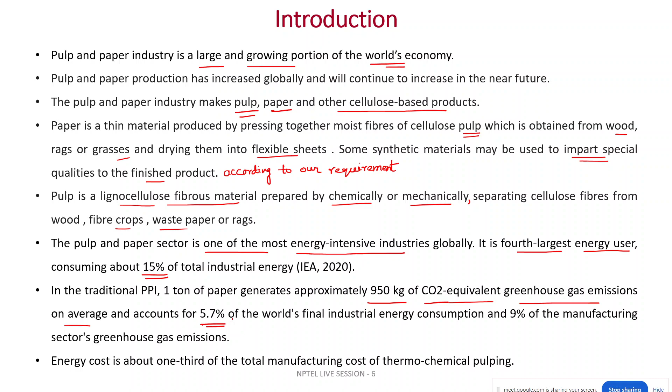This PPI, pulp and paper industry, is also a source of pollution. There will be various kinds of pollution. One is air pollution, because there is a lot of CO2 emission. There will be water pollution as well, because in the chemical pulping process we generally use a lot of chemicals. Also in the bleaching of the pulps, different chemicals are used. So these are the sources of environmental pollution.

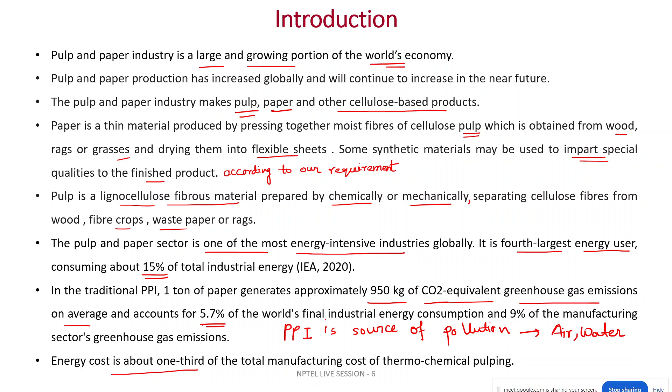Energy cost is about 1/3 of the total manufacturing cost. So you can see how much cost we are involving for energy consumption. It's around 1/3 of the total manufacturing cost of thermochemical pulping. Thermochemical pulping is a type of pulping we will discuss.

Next is pulp mills. They separate the fibers of wood, or from other materials such as rags, waste paper or recycled paper, straws, in order to create pulp. Pulp is the digested form of that wood, digested in the presence of some cooking liquor. So we will discuss what cooking liquor is and how the operation is performed in a digester, under high pressure and some temperature; obviously that pressure and temperature are optimized parameters.

Paper mills primarily are engaged in manufacturing paper from the wood pulp and the fiber pulps also, and they may also manufacture from the converted paper products. Now this wood is composed of cellulose, lignin, hemicellulose and some extractives. There might be fats, resins, pectins, and this can be extracted at the end.

The fiber from nearly any plant or tree can be used for paper making. However, the main concern is the strength and the quality of the fiber, and other factors can complicate the pulping process. That depends on the kind of trees you are using, softwood or hardwood. So depending on that, the strength and quality of the fiber will be different.

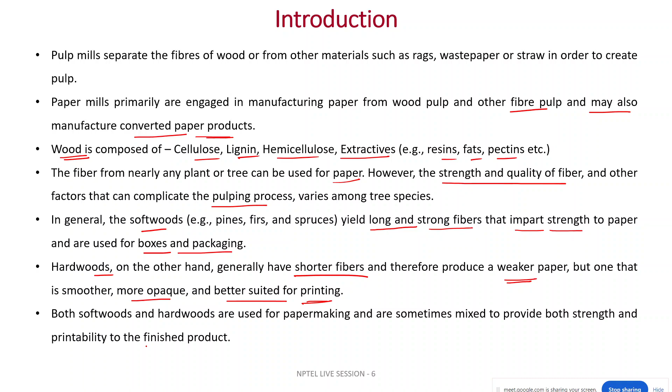Now we see the process outline for paper making, the overall process that we are going to discuss in the next few slides. First section is raw material preparation. So what is the raw material here? Different kinds of woods, rags, grasses, like that. Those are debarked, cleaned, washed, and chopped into a reduced size. Obviously, water is being used, so there will be production of wastewater.

Now the chopped, reduced size raw material will be sent into the next unit, that is the pulping section. In the pulping section, there will be mechanical and chemical separation of the wood fibers from the other impurities. So there we will be using a lot of chemicals and also a lot of water. Now the mixture of dissolved wood fibers in water will be sent for the pulp washing and bleaching section. That would remove the residual lignin. Also there is use of water and wastewater will be collected at the end.

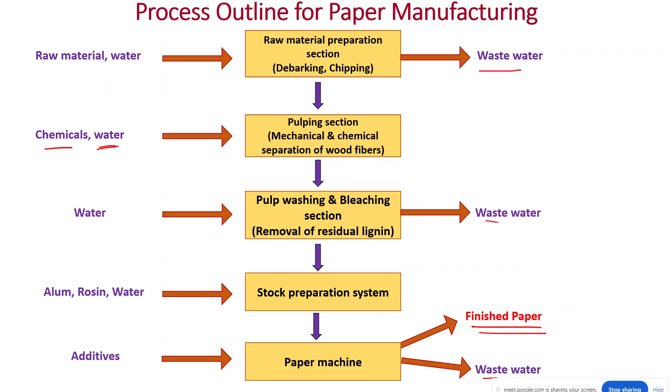Now we will discuss briefly the raw materials we specifically use for paper making. There are two types of raw materials for paper making, namely wood and non-wood portions. Wood may be eucalyptus; non-wood, banana leaves, bamboo leaves, meaning the stem kind of thing. Of these, the pulp and paper industry uses wood as a raw material. Each type of wood produces different types of pulp. That's why, depending on the finished product, we need to carefully choose what kind of wood we are using for the process.

You see from this variation, in the hardwood, the cellulose, hemicellulose and lignin are different from the softwood. Hardwood has cellulose of 45%, whereas softwood has 42%. Hemicellulose: hardwood 30%, softwood 28%. Lignin: hardwood 20%, softwood 27%. Extractives: hardwood has 5%, softwood has 3%.

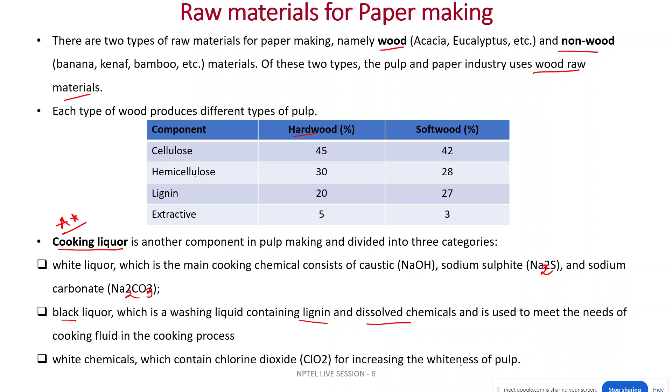And white chemicals contain the bleaching agent chlorine dioxide for increasing the whiteness of the pulp. That is at the end.

So pulping process: wood is the raw material and it is mostly composed of cellulosic fibers. Cellulosic fibers give the tensile strength. Tensile strength means that you are holding these two and there will be tensile strength created in this direction. And along with cellulosic fiber, the lignin matrix will be there. It provides the compressive strength this way. Tensile strength in this way and compressive strength is this way. The force is acting.

Cellulose is a linear poly-beta glucose and pure cellulose is white in color. Cellulose is the fiber of primary interest in paper making. It comprises about 50% of the wood if we are considering oven dry weight. So 50% of the wood is cellulose and that is of the primary interest for paper making.

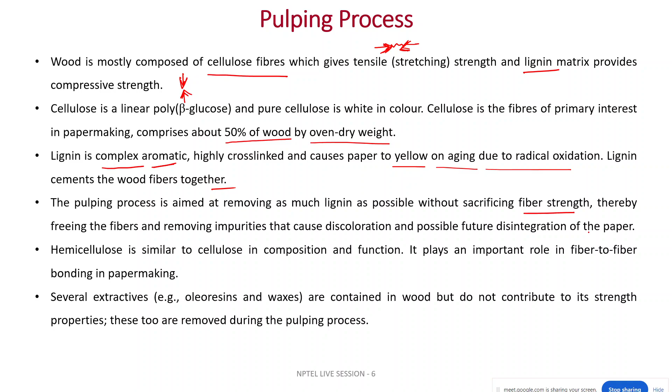Now, the pulping process mainly aims to remove as much as possible of the lignin content without sacrificing the fiber strength, thereby freeing the fibers and removing the impurities that cause the discoloration and possible future disintegration of the paper. We need to remove those impurities, and the main target is to remove the lignin content.

Now, hemicellulose is also a component of the wood, since we already discussed cellulose and lignin. Hemicellulose is similar to cellulose in composition as well as function. It plays an important role in fiber bonding in paper making. Several extractives, waxes, oleoresins are contained in wood but they do not contribute to its strength properties. So these can be considered impurities and should be removed by the pulping process.

I hope it is clear that pulp is nothing but the digested form of the wood. In wood there is cellulose, hemicellulose, lignin. Cellulose and hemicellulose are desired content. Lignin is not a desired content. Lignin should be dissolved in the cooking liquor and taken out. And that pulp is further processed through bleaching and other activities.

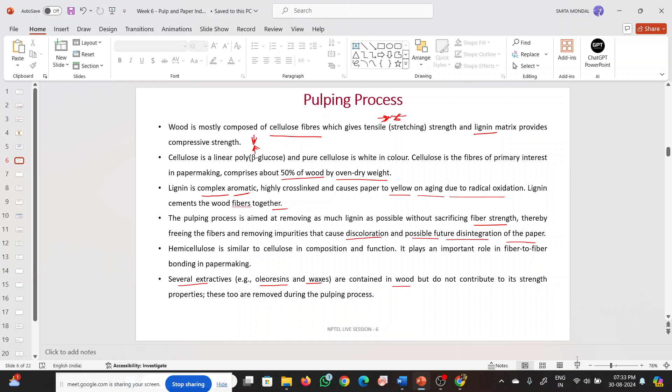Continuing to the pulping process, pulping can be of different types: mechanical pulping, chemical pulping, and chemi-mechanical pulping, which is a combination of the two processes. Mechanical pulping consists of grinding the raw material, more generally softwood, against an abrasive surface to defiber it, without any lignin dissolution. So without affecting the lignin, we are only trying to defiber the raw material.

Chemical pulping is mostly adopted industrially, that is the kraft pulping. Obviously, there are other chemical pulpings present. In this method, it separates the fiber from the raw material by making all of the non-cellulosic components soluble in a cooking liquor at a certain high pressure and temperature. This pulping gives better quality, but as I already mentioned, it creates a lot of pollution. Wastewater is created, and there will also be air pollution.

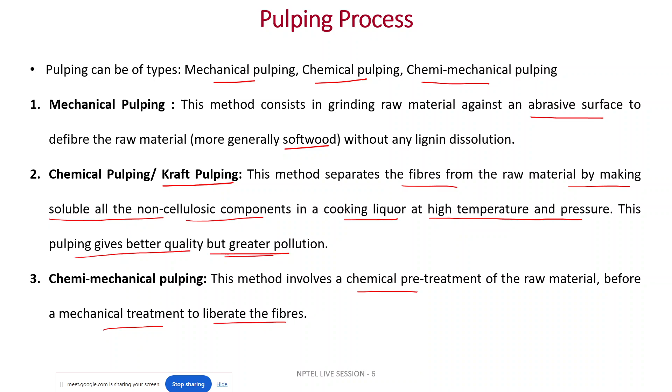Chemi-mechanical pulping involves a chemical pretreatment of the raw material, and then it is sent to mechanical treatment to liberate the fiber. So three methods of pulping are available, but mostly chemical pulping is adopted. You need to take care of certain important factors for pulp.

So the first factor is moisture content of the pulp. It is very important from the point of view of storage, transportation and handling. Also the dirt content of the pulp, particularly of recycled pulp, is important for its suitability to make fine paper.

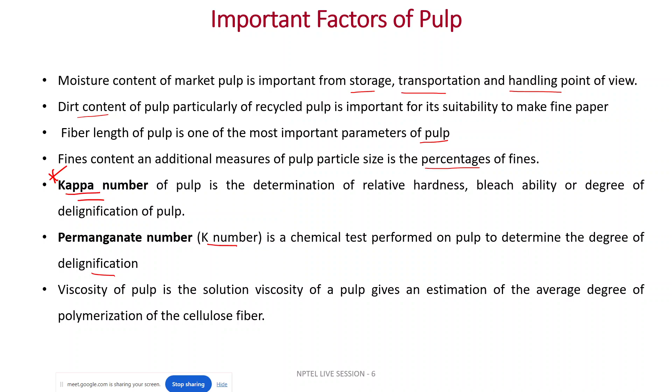So we already discussed the important parameter kappa number. The kappa number estimates the amount of chemicals required during the bleaching process of the pulp to obtain pulp with a degree of whiteness. Since the amount of bleach needed is related to the lignin content of the pulp, the kappa number can be used to monitor the effectiveness of the delignification or lignin extraction phase of the pulping process.

So the kappa number is nothing but monitoring of the delignification process. It is approximately proportional to how much residual lignin is present in the pulp. If more lignin is present, the kappa number will be higher, which denotes that the color of the pulp is very dark. The downstream processing will depend on that kappa number. If the kappa number is very high, the resulting pulp tends to be very dark, and vice versa. Kappa number can range from 1 to 100.

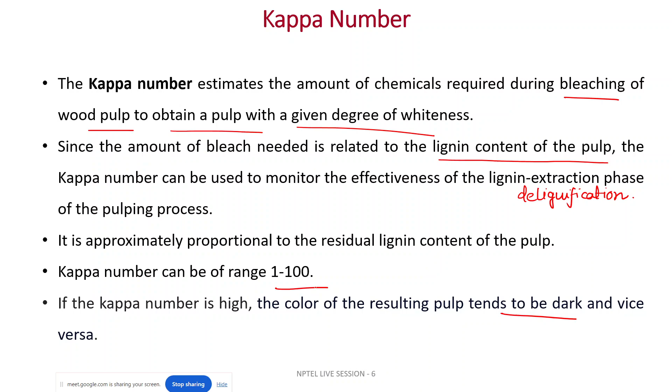So we already discussed very briefly three different kinds of pulp varieties, right? So the first one is mechanical pulp. One process is making stone ground wood pulp. In that, mechanical grinding of the wood into relatively short fibers is performed, used mainly in newsprint and wood containing papers such as lightweight coated and super calendered papers.

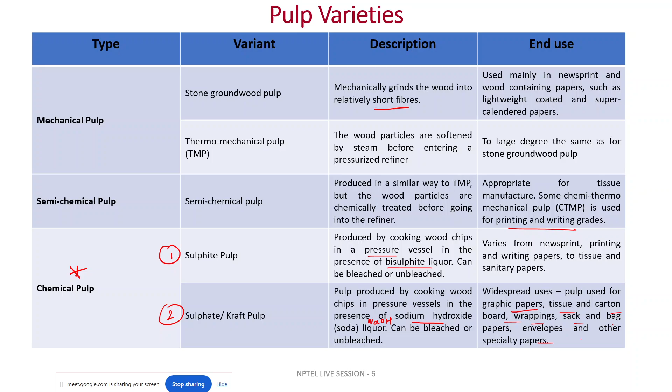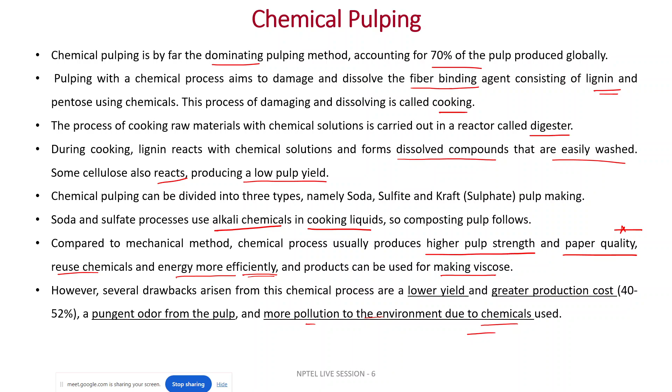The first process is the soda pulping process. In the soda pulping process, the cooking solution used is soda. Soda means sodium hydroxide, NaOH, is used. The soda solution's function in the process is hydrolyzing the lignin and the other fiber binding agents so that the fiber contained in the raw material will be released. The lignin content will react with the NaOH so that the lignin is released from this fiber.

Lacking cooking chemicals will result in a darker color of the pulp, and there will be difficulty in bleaching in the downstream process. However, excessive cooking chemicals can also reduce the yield through the degradation of cellulose fibers. You may think that with excessive chemicals there will be more yield of pulp. This is nothing like that.

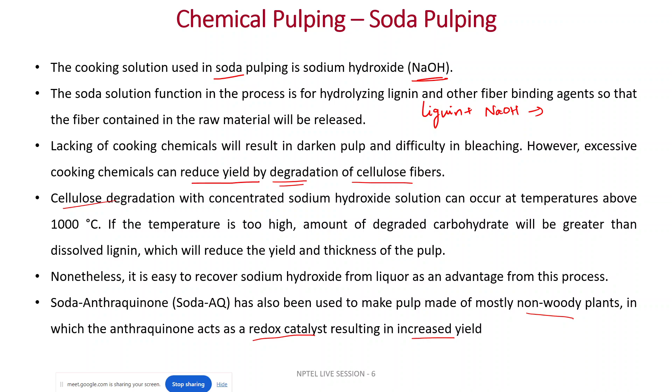Next process is sulfite pulping. The sulfite process produces wood pulp which is almost pure cellulosic fiber. We are using various salts of sulfurous acid, which are used to extract the lignin from the wood chips in a large pressure vessel, which is called a digester.

So, in the sulfite process, the salts used in the pulping process are either sulfites, SO3 2-, or bisulfites, HSO3-, depending on the pH. The counter ion may be sodium, calcium, potassium, magnesium, and ammonium. The lignin is converted into lignosulfonates, which are soluble and can be separated from cellulosic fibers.

Now, this sulfite process involves two types of reactions. First one is hydrolytic splitting of the cellulose, followed by reaction of the lignin with bisulfites.

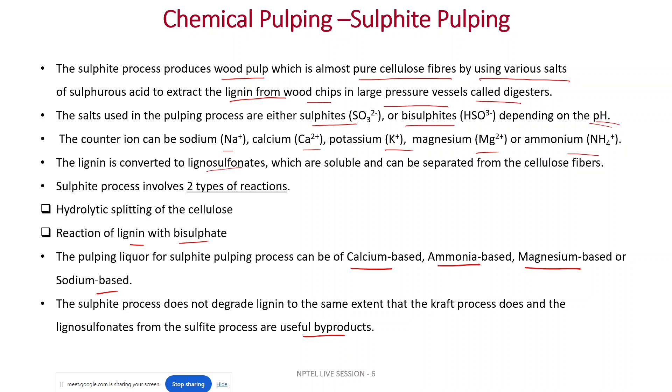So now we will be discussing the difference between the sulfate and sulfite pulping processes. There is a lot of difference; we will take them one by one. Let me write it as sulfate pulping, and here we will discuss sulfite pulping. Sulfate pulping is also known as the Kraft process, whereas sulfite pulping is also known as the magnefite or neutral sulfite process.

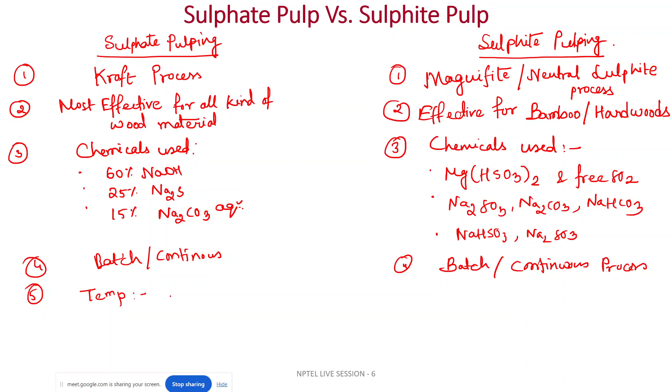Next, the sulfate pulping process is mostly done in continuous form, but overall we can say batch or continuous process can be followed in both cases. Next, the parameters. In sulfate pulping, temperature is maintained around 170 to 180 degrees Celsius, and very high pressure, 10 atmospheres. Whereas in the sulfite process, temperature is lower, 120 to 150 degrees Celsius, and pressure is lower, 4 to 6 atmospheres.

Next is the time for digestion: around 5 to 6 minutes, very fast. And for this one, the time of digestion is much longer, like 6 to 10 hours.

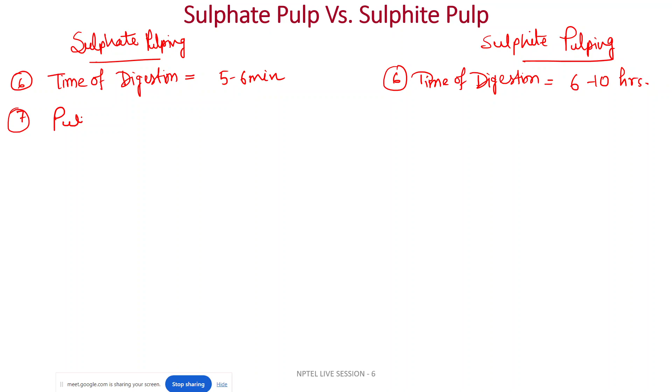The type of pulp produced, the pulp quality: sulfate gives brown color pulp. Chlorine dioxide is used for bleaching of the pulp, and the unbleached fibers are very strong.

Whereas in the sulfite process, the pulp is off-white, dull white in color, already white, and it is also easily bleachable. But here the fibers are weaker.

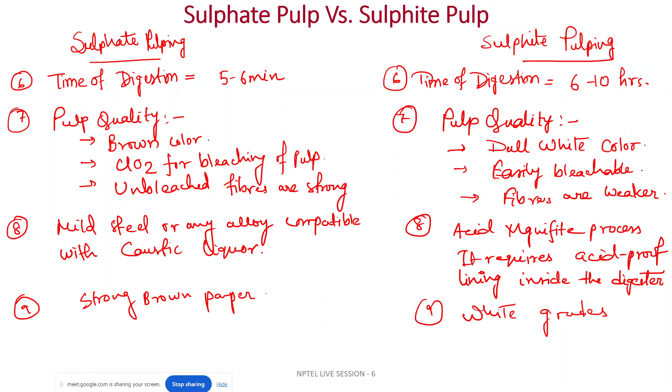Moving forward, we will now discuss the sulfate or Kraft process. The Kraft process dissolves and removes the lignin matrix from the cellulose fiber, just like other chemical processes. The active cooking chemical is white liquor, which consists of NaOH and sodium sulfide, Na2S. A highly alkaline chemical and wood mixture is cooked in a digester under high-pressure steam. The cooking liquor containing dissolved lignin and other extractives, collected from the bottom of the digester, is known as black liquor, and it is routed to a chemical recovery plant. Very important.

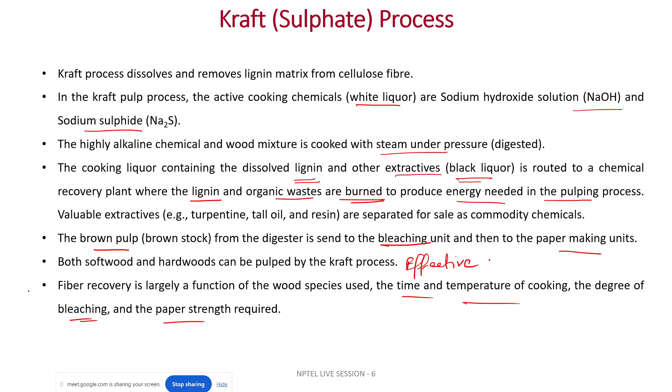There the lignin and organic waste are burnt in a smelting furnace to produce the energy needed in the pulping process, and the valuable extractives are separated for sale as commodity chemicals. Brown pulp from the digester is sent to the bleaching unit and then to the papermaking units. Both softwoods and hardwoods can be pulped by the Kraft process; it is very effective. Fiber recovery is largely a function of wood species, cooking time and temperature, degree of bleaching, and required paper strength. So I will discuss mostly the Kraft process chemical reactions involved.

So first is hydrolysis. Hydrolysis, see, in the Kraft process our main chemical is NaOH. So first is digestion, hydrolysis and solubilization of lignin.

So what happens? Suppose this is some kind of biopolymer, and you are using caustic soda, or NaOH. So you are giving some cellulosic OH content. Next, this biopolymer again reacts with OH. It gives a different product as ester. Some cellulosic ester is being formed. So the rates of these reactions are different. That's why you are getting different products.

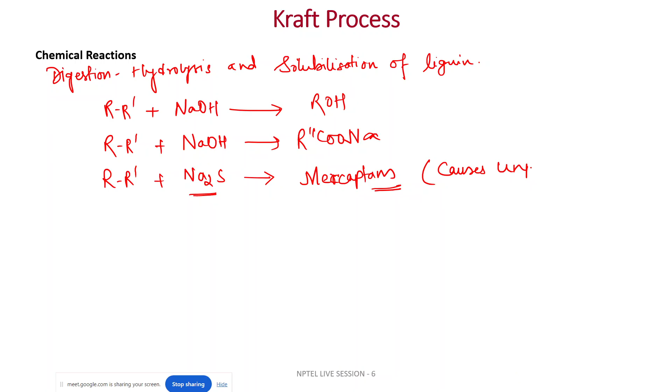These biopolymers react with Na2S. How this Na2S is coming, we will see in the next reactions. So they produce mercaptans, and this causes an unpleasant smell.

Now, in the flow sheet, you will see there is one section that is called the smelting furnace, smelting process, and another section that is the causticizing process. These two processes are very essential to supply the Na2S for digestion of the lignin. So what happens in the smelting process is that the lignin salt in the black liquor reacts with air, some preheated air you supply, and it will form Na2CO3.

Because this R contains carbon, hydrogen, oxygen. Okay, so this carbon will react with oxygen and it ultimately forms Na2CO3 and some CO2 gas. Now another, Na2SO4, also reacts with carbon and they form Na2S. So this Na2S is being used here.

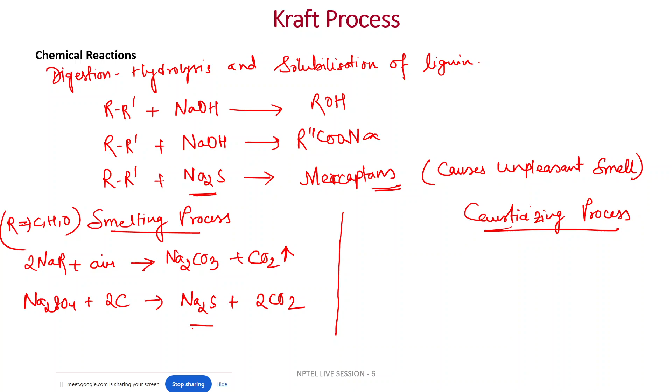Whereas in the causticizing process, this is further taken to the causticizing process. Na2CO3 reacts with Ca(OH)2 and it produces sodium hydroxide and CaCO3. This CaCO3 further reacts, it produces calcium oxide plus CO2. This CaO is hydrolyzed and it forms Ca(OH)2. So this Ca(OH)2 can again react with this. It again forms CaCO3, and these reactions are self-dependent, you can say.

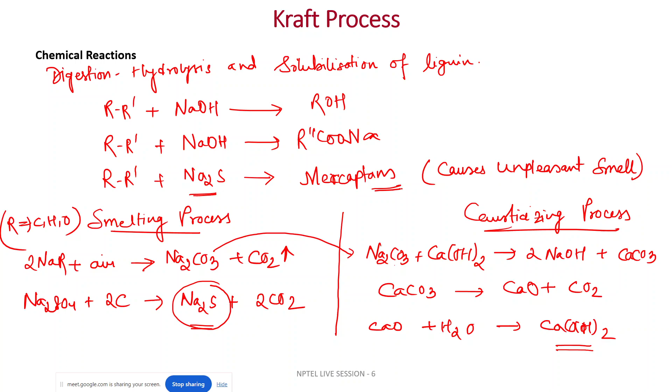So ultimately our main product is Na2S; we require to produce a sufficient quantity by this chemical recovery process so that it can be used in the digestion process. Okay, so yeah.

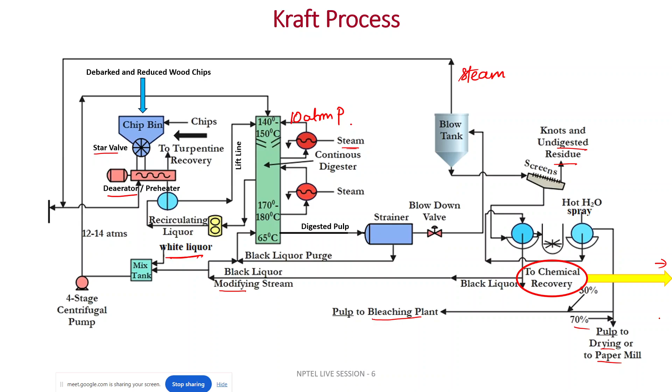And the pulp is being produced from the rotary filter. The solid content is sent to the bleaching plant, almost 30%, and 70% pulp is sent to the drying or paper mill. Now, we already see the 30% of produced pulp we sent for the bleaching.

So in bleaching, what happens? There will be a removal of the color residue, or the bleaching may be accomplished by use of some bleaching agent. There are various oxidizing agents we use. This agent must be cheap and have minimum degradation action on cellulose. It should not react that much. Traditionally, chlorine type oxidizing agents are used in stage-wise operation.

However, bleaching has been found to produce dioxin and other undesirable components in the bleach effluent. The use of chlorine as paper mill bleach has steadily decreased because of these undesirable components present in the effluent. To a substantial extent, chlorine is replaced by hydrogen peroxide.

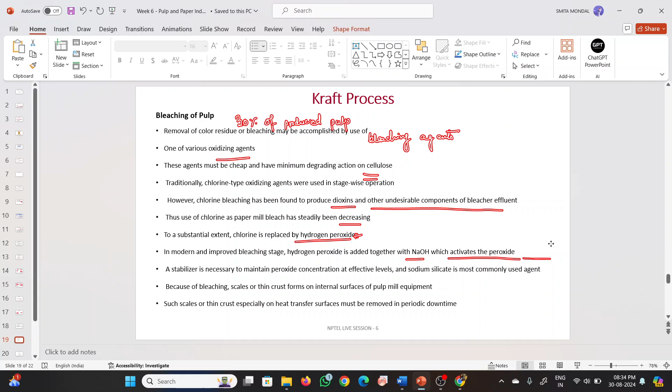so a stabilizer is necessary to maintain the peroxide concentration at effective levels, and sodium silicate is the most commonly used stabilizer agent. Because of bleaching, scales or thin crust are formed on the internal surface of the pulp mill equipment. Such scales or thin crust, especially on the heat transfer surface area, must be removed for periodic investigation or maintenance. It should be removed.

So now we will discuss the chemical recovery. So we have received the black liquor from the pulp plant. Now from that black liquor, we need to recover the chemicals, and that should be used back in the pulp unit.

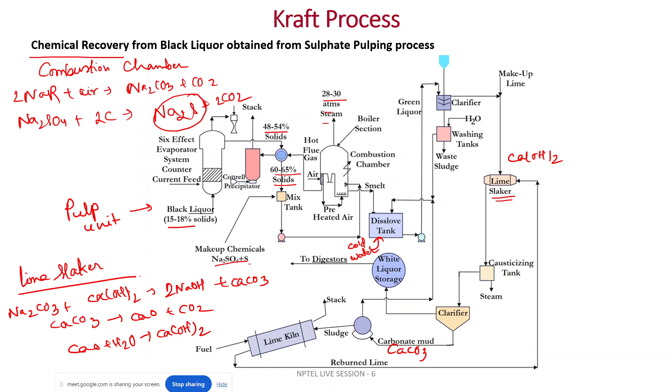CaCO3 further reacts to give CaO and CO2. CaO is hydrolyzed back to Ca(OH)2. So these are the purposes of these units. Okay.

So at the end, I am discussing very briefly the overall kraft pulping process. Wood chips are first fed into the delignification process. In the delignification process, cellulose fibers are separated from the lignin in the digester using a chemical mixture of Na2S and NaOH. This is called the white liquor.

Okay. In the delignification, we are using this white liquor, and after washing, the fibers are sent to the bleaching plant, drying and pulp. In the bleaching plant, we use chlorine dioxide. Finally, the used delignification liquor is called the weak black liquor.

So these liquors are separated from the fibers in the washing steps and concentrated in the evaporator to make heavy black liquor, and then it is sent to the recovery boiler or smelter combustion unit. From there, steam is produced, and it is used in the turbine generator and as process steam.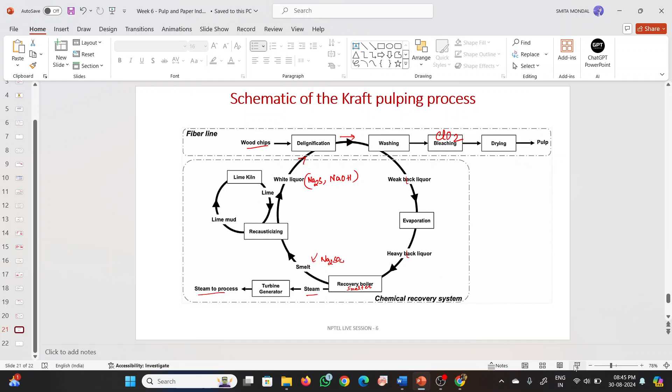After that, it is recausticized again. Spent inorganic chemicals are sent to the smelter, and in the smelter there will be a recovery boiler. In the smelter there will be Na2SO4 addition.

And then the lime is used, lime kiln and this, and then we will have green liquor that we are getting from the smelter unit. Then it is recausticized. So in between we are getting green liquor that is sent to the recausticizing unit, and then again the white liquor is regenerated and we can use it. So this is a complete cycle.